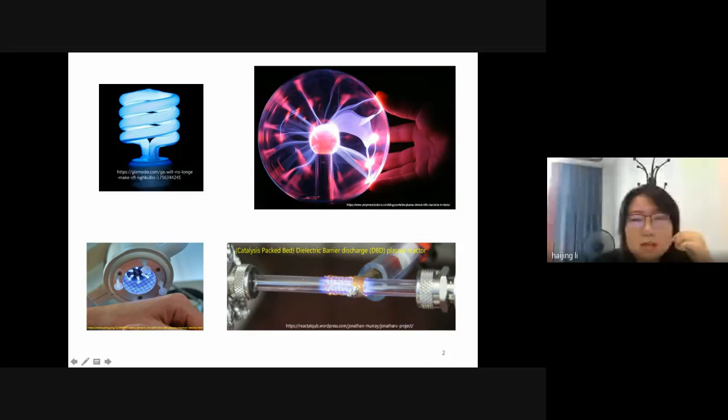First, we want to know the interplay between the fluid and the simplified plasma chemistry. Second, we try to get a phenomenological model which can qualitatively predict the result. The work is on a dielectric packed bed reactor.

We have positive and negative electrodes on the top and the bottom boundaries. The dielectric packing beads are homogeneously located in the reactor. A fluid with only neutral species A will flow into the reactor, and because of the electric field there, electric breakdown reaction will take place.

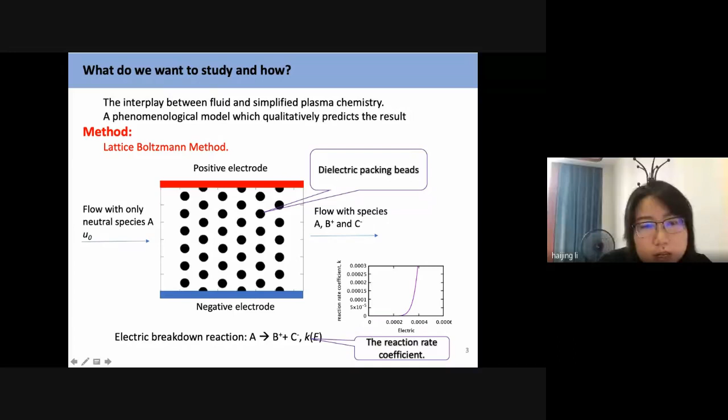It will make the neutral species A react into the positive B and negative C. The reaction rate coefficient K of this reaction is a function of the local electric field. From this curve plot, we know that if the electric field is lower than this value, K is almost zero. This means almost no reaction takes place.

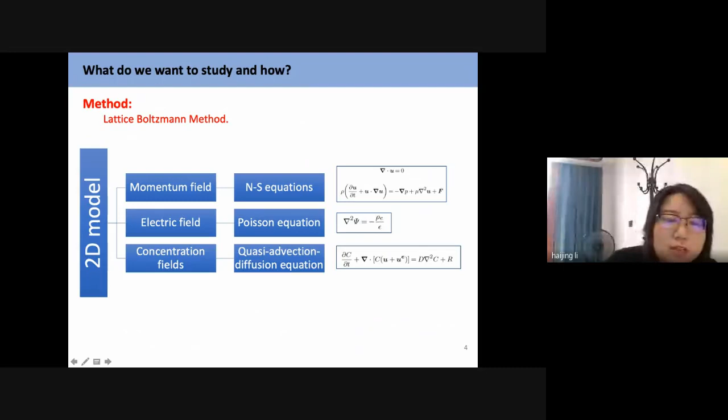We work with the lattice Boltzmann method. We have developed a 2D model. We have Navier-Stokes equations for the momentum field, the Poisson equation for the electric field, and a quasi-advection diffusion equation for the concentration field. This quasi equation is derived from the advection diffusion equation and the Nernst-Planck equations.

In the Poisson equation, this rho C is the volumetric charge density of the charged species. It will include the influence of the charged species in the concentration field into the electric field. And in this quasi equation, this UE is the equivalent velocity that is introduced by the electric field on the charged species.

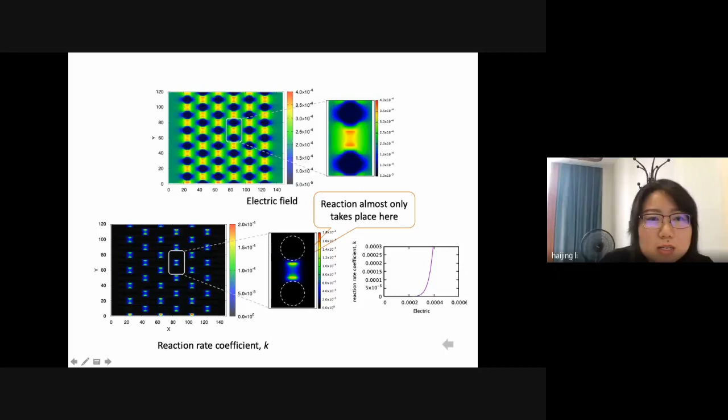This is the electric field distribution. From this plot, we can see the electric field between the beads is enhanced dramatically. This makes the reaction rate K only exist here, while in the rest of the area it is almost zero. This means the reaction almost only takes place between the beads.

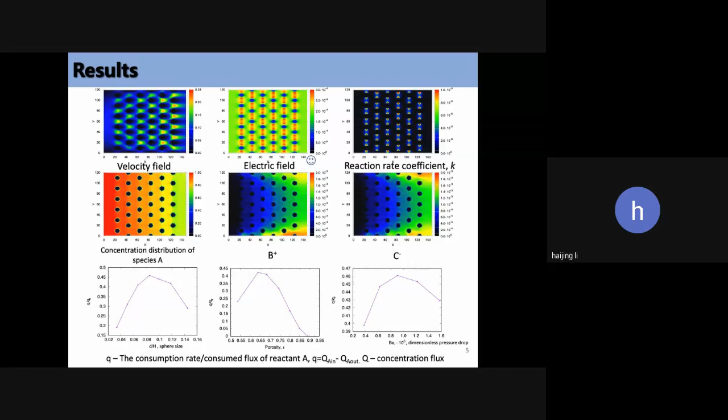To measure the conversion efficiency of this reactor, this Q will be the inlet concentration of A minus the outlet concentration flux of A. This is Q as a function of the sphere size, the packing porosity of the reactor, and the pressure drop of the fluid in the reactor. From this plot, we can see there are trade-offs between Q and these control parameters.

And the peak point exists. This means the control parameter at this point is most efficient for the reactor. With this lattice Boltzmann model, advances can be made on the control parameters of the reactor to make better use of this kind of reactor.

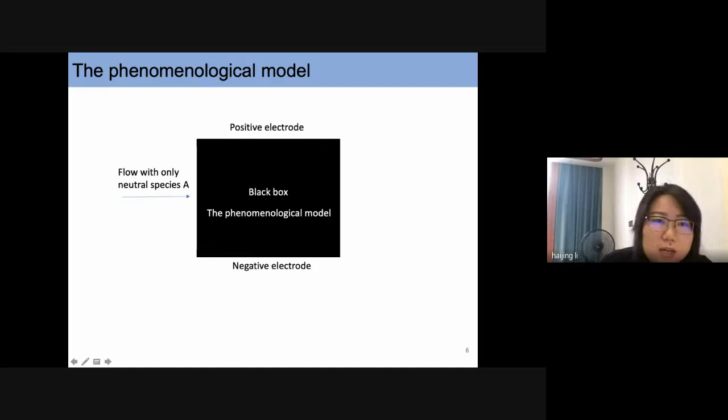After the lattice Boltzmann model, we tried to get a phenomenological model. In this model, we regard this reactor as a black box. If a fluid with only neutral species A flows into this box, with the phenomenological model, we want to get some information of the outcoming products. The aim of this model is, without running the test, it can qualitatively predict the dependence of Q on some control parameters and give advice on the most efficient control parameters at this star point.

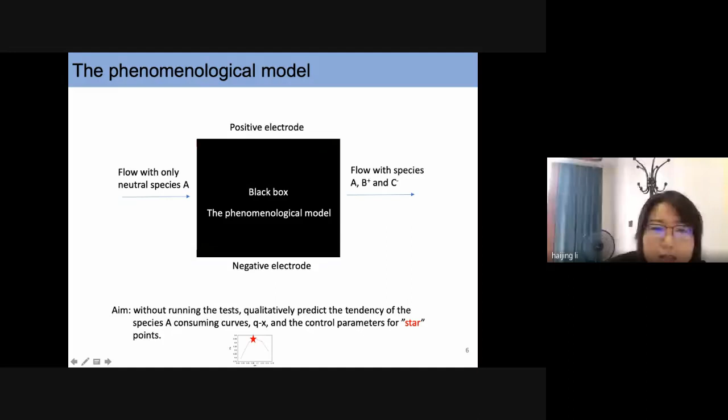So let's see, firstly, what information we have without running the test. First is the packing geometry of the reactor, including the dimension, the porosity, and the bead size.

Second is the potential of the electrodes. The third is information of the incoming flow, including the concentrations, the velocity, the density, viscosity, and the fluid pressure drop in the reactor. The last one is the reaction that's going to take place in the reactor, and the reaction rate coefficient as a function of the electric field.

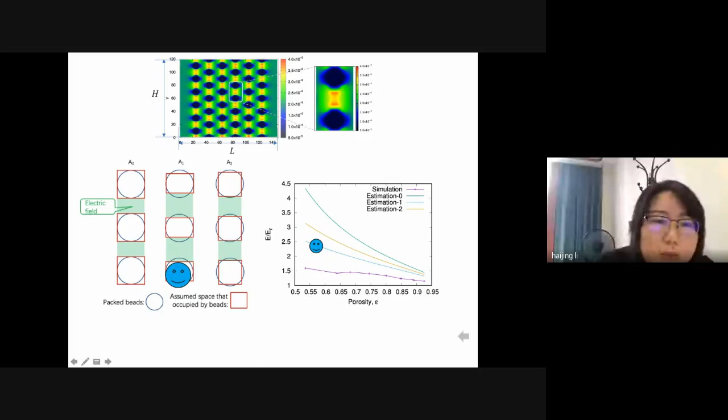Here are the results of the electric field from all these assumptions and the simulations. From this result, we can see the result of assumption 1 is the closest one to the simulation. So we apply assumption 1 to our phenomenological model.

The average electric field will be the gradient of the potential drop between the electrodes, and here we only take the green areas into consideration, because from this figure we can see the potential drop inside the sphere is relatively small. In this equation, Ny is how many green areas there will be, and in a homogeneously located spheres packed bed, Ny can be calculated like this.

Finally, the average electric field will be read like this, and we add an H into this equation. It is a correction factor to make assumption 1 closer to the simulation.

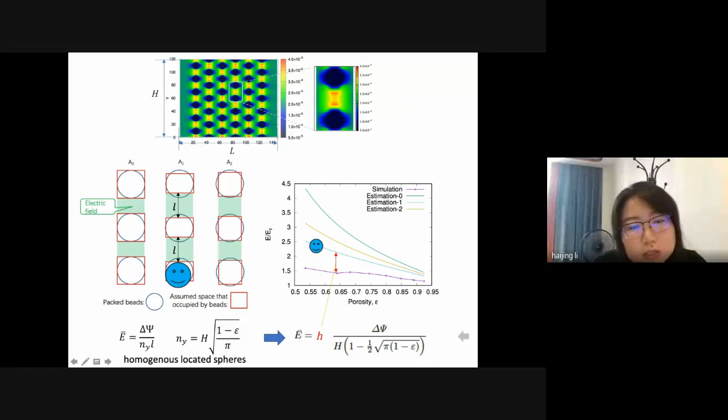At last is this T. This T is the time duration the reactant stays in the reactor. Similar to the electric field, we also only take the green areas into consideration, and T can be calculated like this. This U bar we can get from the Darcy law.

So finally, we have it like this. Now we have every piece of information for this equation. We can use this equation to calculate Q and make some predictions.

Finally, the conclusion and outlook. First, we found the dielectric packing beads can locally distort the electric field and make a difference in the reaction.

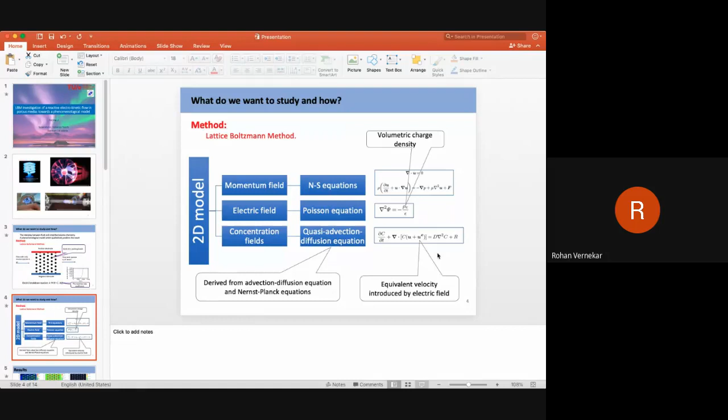No, I think it is a function of - let's see, the electric field will make a force on the charged species. It will accelerate or slow down the charged species. So this ue is a function of the electric field and the charge of the charged species. Yes, so if the charge of the species changes, ue will change, right? Is this what I understand? Yeah. Okay, so as the reaction proceeds, you'll get a different ue.

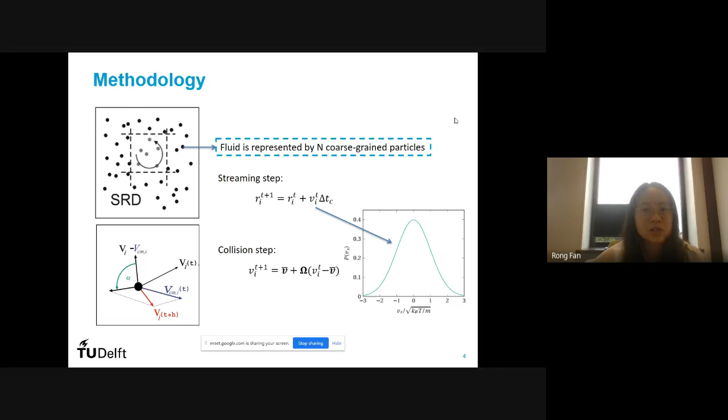Since we are going to study a reactive system, we would especially care about the boundary conditions, because for heterogeneous catalyst, the reaction happens on the solid surface. So in SRD, there are two ways you can achieve a no-slip boundary condition.

First, you can make the particle directly bounce back with the opposite velocity from the solid wall, or you can make the particle bounce back with a new velocity which still follows the correct velocity distribution. The second one is called stochastic bounce back. Later, I will tell again how it is used in our simulation.

I also listed some of the units and parameters on the slide of SRD for your information.

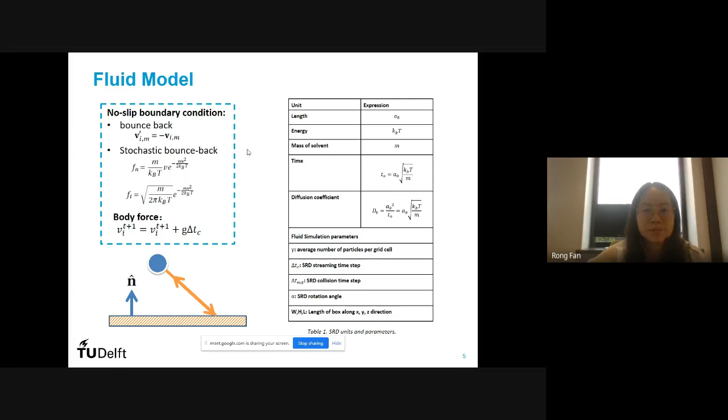Okay, so now I have already told something about the method itself. Then I'm going to give more details about how we simulate the reactive system. First, we need to define the geometry.

To define the geometry for the catalyst pellets or for the microchannels, the micropores in the catalyst - one advantage of SRD is that it is a lattice-free method, so you are relatively free to define the geometry with any mesh you like.

And also, that's another way - you don't need to mesh it, but you can also define your geometry based on some shapes which can be mathematically described. Like you can define the catalyst as spheres, and the spheres can be condensed to be packed in the domain. It will be like the catalyst pellets packed in a packed bed reactor.

So after we have the way to define the geometry, we could probably think about the reactive surface. In SRD, you can also simulate a Langmuir-Hinshelwood reaction mechanism.

Like this: when a particle hits on the surface, a probability test would be taken to decide if the particle is going to stay on the surface, if it's going to be adsorbed, or if the particle is going to be bounced back to the fluid.

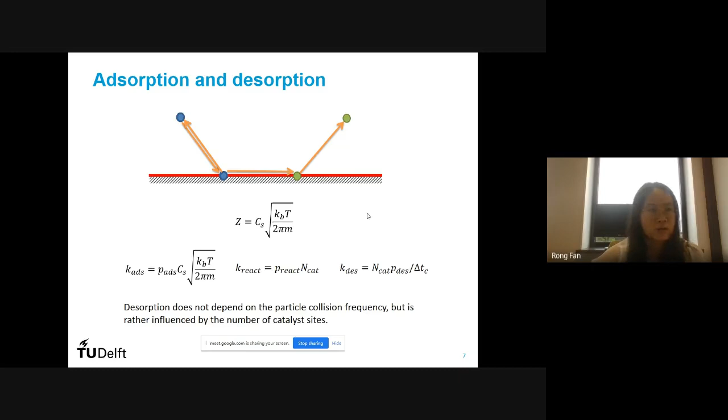Now that the reactive surface is already defined, I'm going to show you a case about how we simulate the reactions in SRD.

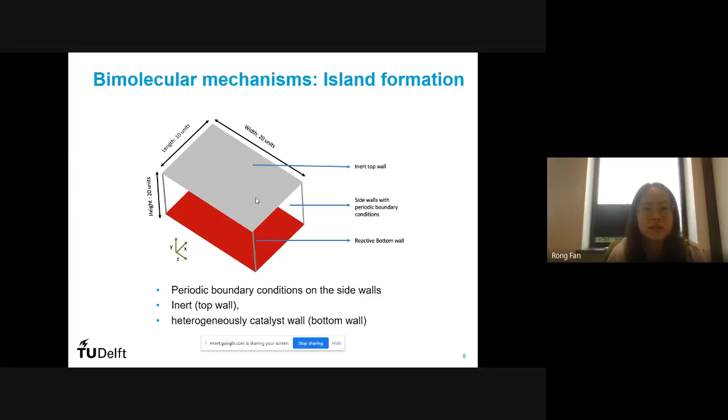As can be seen in the graph, in this domain there are two surfaces: one is reactive, in the color of red, and another one is not reactive, and enclosed is the SRD fluid. On the reactive surface, a bimolecular reaction is going to happen.

It is a simple, irreversible A plus B to C reaction. And we give it a little interesting feature for this reaction.

So the reactive surface will be divided into square grids. One particle adsorbed on one square grid can only interact with its first and second neighbor, and we give it a different interaction between particles from two different species. Therefore, the particle will have a tendency to stay close to other particles which are from the same species.

So with such a feature, we will get particles adsorbed and reacted on the surface forming a pattern, which is like an island. With the island formation, this will lead to a non-mean field behavior, and this will actually influence the reaction rate.

We compared the occupation of the unreacted particle on the surface with the mean field assumption versus with island formation effects. You can see from this graph that with island formation, the occupation of unreacted particle will actually increase, because the chance that particles from species A and species B contact with each other will be lower.

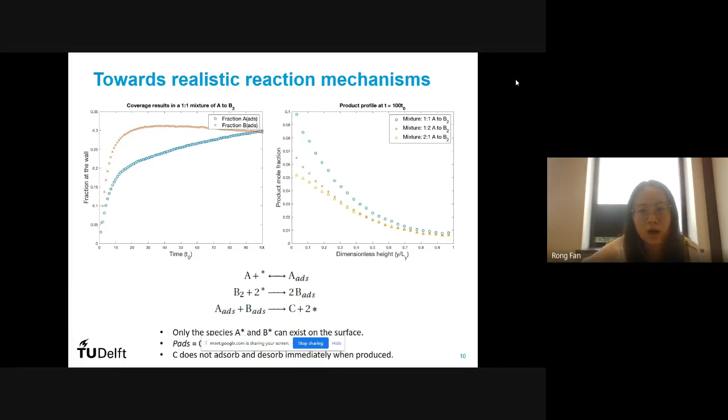So this is what we want for developing SRD: we would like to have the mass transfer in the continuous phase and the reactive surface reaction simultaneously. I have already talked about the reaction and mass transfer part for SRD, but we also care about the energy change during the reaction, because the energy change will result in some temperature change, and the temperature change will actually influence the rate of reaction.

For SRD, unlike CFD, you cannot directly see the temperature as a parameter in the simulation—it is a method with thermal fluctuations. So actually the only way you can know the temperature is to measure the velocity distribution and get the temperature from that distribution. Because of this, most current research with SRD uses thermostats to control the temperature in a certain range, but doesn't include real-time temperature change with the reaction.

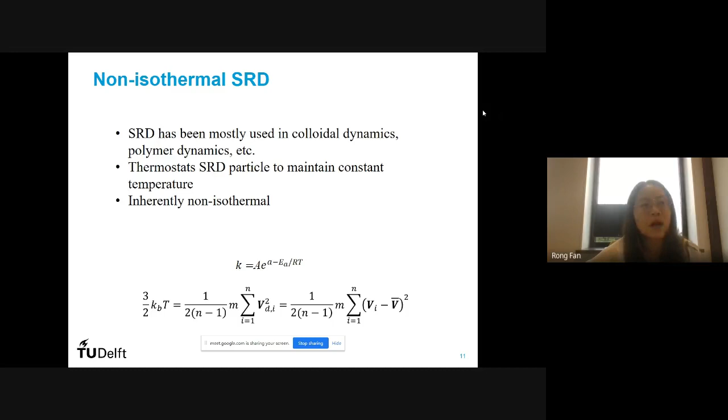Our ambition is that for the chemical reaction, we could measure the real-time and local temperature change. So how can we do that? We have to measure the velocity distribution, then collect a lot of samples of the particles to get the distribution, and then get the temperature.

The first and simplest way you can think of is that if you have steady states, you can collect samples from different time steps and do time averaging to get the temperature for the whole simulation. Or if unfortunately you don't have steady states but you have a symmetric system, you can still collect samples from different spatial positions to get the average result.

But what if you don't have steady state and you don't have a symmetric system, and you want to really measure the temperature in a quite complex geometry, really locally? We figured out there's still one way to do it: if you have many parallel simulations that are all equivalent to each other, you can collect samples from these simulations to get an average result for your temperature, then fit this temperature back to the simulations. This way, you can actually simulate chemical reactions with real-time temperature change.

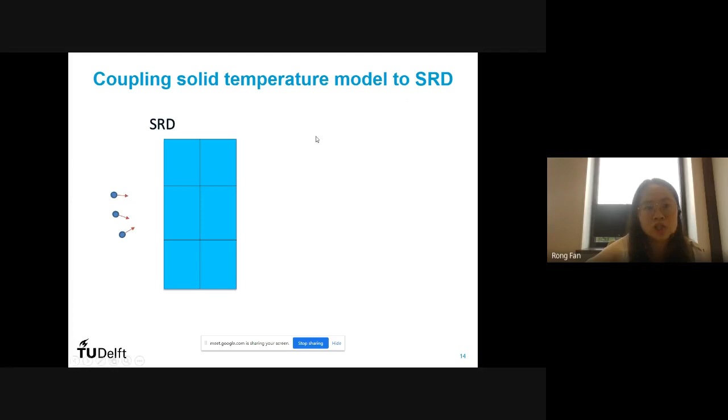Thank you very much. I will just show you some graphs about our case. We did some tests for the temperature change in the fluid, and also measured the thermal diffusivities, and we also did the temperature change between the solid phase and the fluid phase—a measurement for the temperature change in a solid sphere in a 3D box-like domain with a hot fluid line.

So now, as the summary for this presentation, I presented three developments we made for the SRD method to achieve simulating the reactive system. Our future plan is that I hope we can combine all three developments to simulate a realistic chemical reactor, combining also the transport phenomenon inside it.

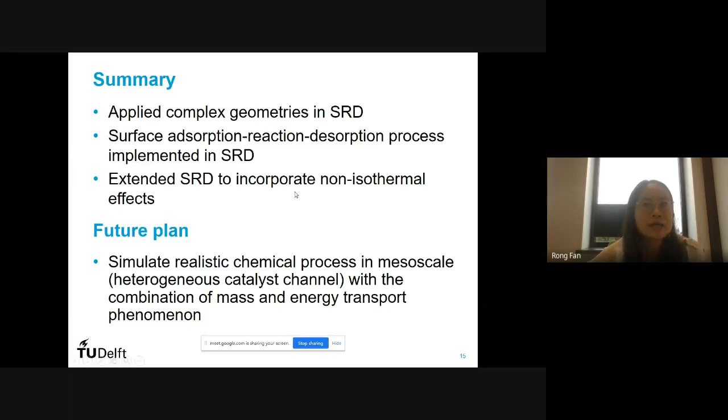Before I end this presentation, I would like to thank everyone who contributed to this project, especially the master students who did a lot of the simulation work. And that's all, thank you for listening.

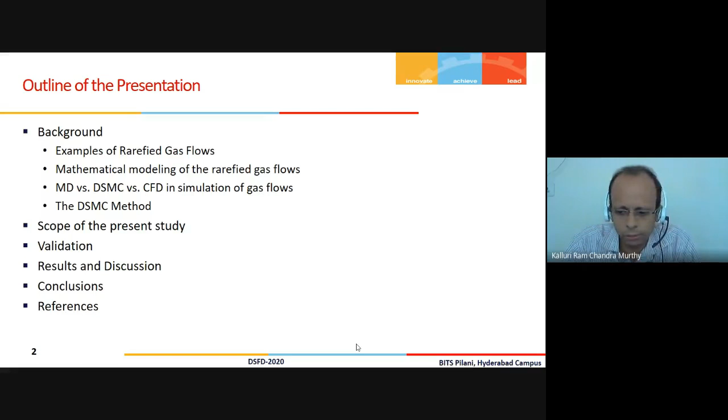I think this problem is somewhat different from most of the other talks, which are based on LBM. This is a slight departure, and it's based on DSMC method. This basically deals with rarefied gas flows, which are flow of gases at very low densities, and they are characterized by something called Knudsen number, defined as the mean free path of the molecules divided by the characteristic length scale of the problem.

So there are several instances where you encounter such flows, typically aerospace applications, when we are talking about flow around satellites or re-entry vehicles or nozzles and jets in space environment.

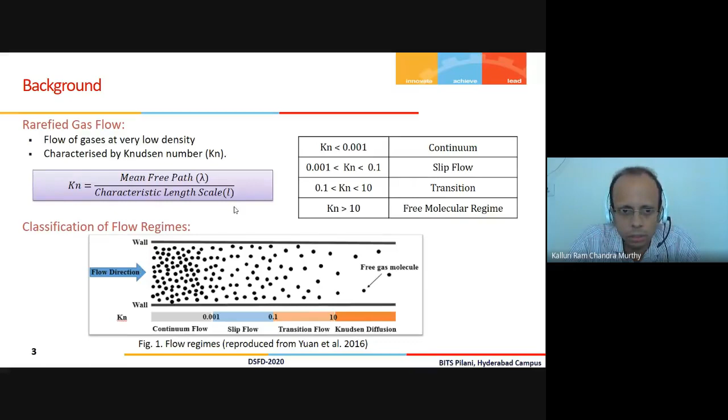In addition to that, we also see the same flows in micro scale, that is typically in microfluidics. Because the Knudsen number is given by lambda by L, in microfluidics the characteristic length scale is inherently small, so Kn is supposed to be large. That causes these flows also to be in the rarefied regime.

So there are several techniques typically used to model such flows. Typically the Navier-Stokes equation fails there because the continuum assumption itself fails there. So for the slip regime, we can modify the Navier-Stokes equation slightly with respect to the boundary conditions and proceed with the modeling. And typically in the rarefied flows, the kinetic theory of gases is employed to analyze them, and the Boltzmann equation is used to model the flow.

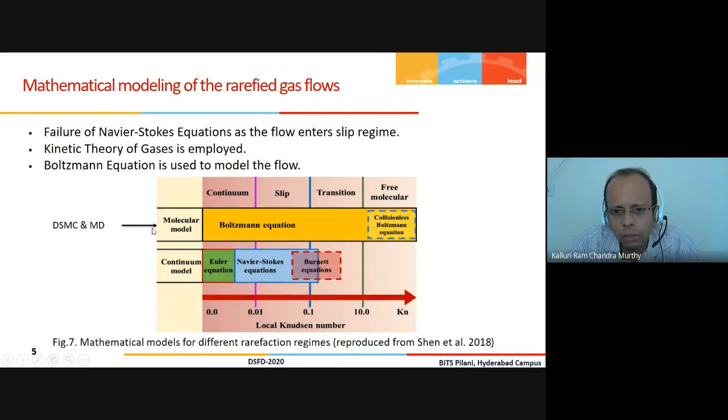So if you're talking about continuum modeling, we have Euler equations at very low Knudsen numbers, and then the Navier-Stokes equation, and then the Burnett equation, which can partly deal with the rarefied regimes. But we also have particulate methods like DSMC and molecular dynamics, which solve the Boltzmann equation in a stochastic manner.

So in this present method, we employ the DSMC method, called the direct simulation Monte Carlo method, proposed by Professor G.A. Bird, and it solves the Boltzmann equation stochastically.

So essentially the idea is, when we have an enclosure with real molecules inside it, we group some of the molecules and call it one DSMC particle or a simulated particle. The algorithm proceeds this way: we initialize the particles with positions and velocities, and move these individual particles as they interact with the boundaries. We re-index their positions in the entire domain, which is divided into different cells for sampling the flow properties.

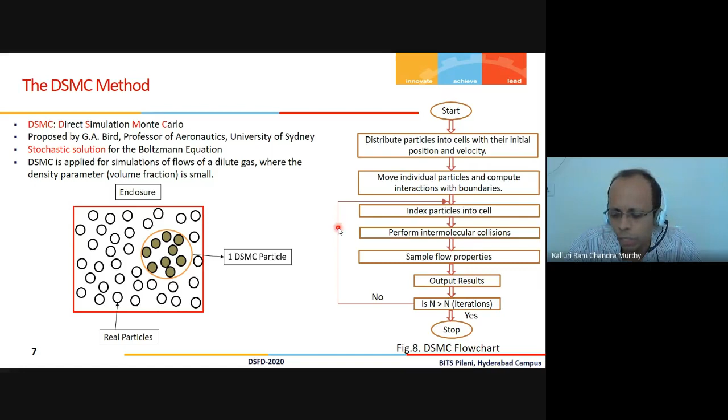In each cell, the molecular collisions are performed, which is basically probabilistic in nature. Then the flow properties are sampled as averages of pressures, temperatures, and so on. Once the simulation has converged, we sample this and output the flow quantities. So that's basically the outline and background of this method.

In this present study, we are using the dsmcFoam solver, which is part of OpenFOAM, to first validate a benchmark, and then we study the flow over an open cavity, where we have three different physical quantities: Mach number, Knudsen number, and wall temperature ratios, for which we simulated the problem.

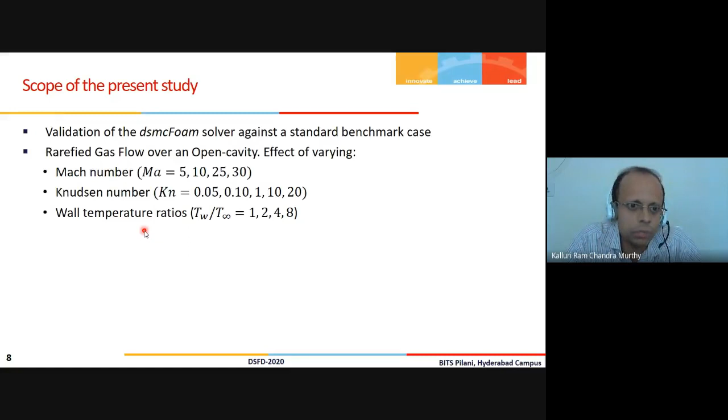First, let me present the validation of this problem over a flat plate. We considered hypersonic flow over a flat plate, one of the simplest problems to begin with. There are several experimental results by Becker and others for the flow of helium over a plate of 50 mm length and 25 mm width approximately. The same has also been validated numerically by Hermina and the group for these flow configurations. The temperature is roughly 10 Kelvin, pressure is 0.3 pascals, and the free stream velocity is fairly high, 1700 meters per second, along with other flow properties.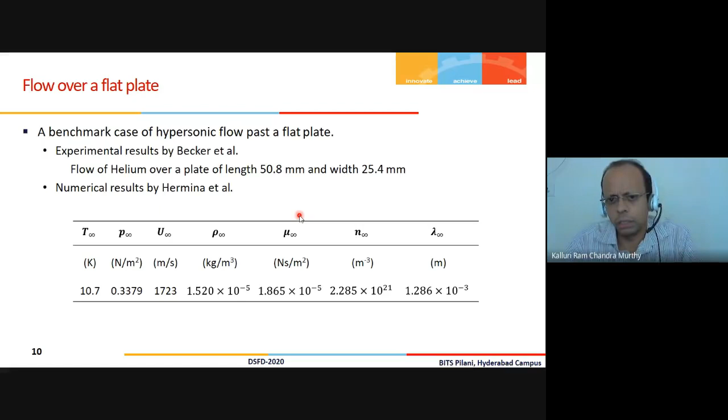Next, I'll go to the main theme of this talk, which is rarefied gas flows in an open cavity. This is a well-studied problem in traditional fluid mechanics using continuum flow solvers. Essentially we have a flow occurring from the left side to the right side, where the inlet boundary on the left is modeled as a free stream inlet, and even the top boundary, supposed to be sufficiently far from the cavity, is also modeled as a free stream inlet, though the flow occurs only parallel to the bottom surface. The right side surface is modeled as an outlet, and the bottom surface is the no-slip wall.

However, since this is a rarefied flow, we do see slip flow close to the wall. The beginning portion of this domain is given a symmetry boundary condition, so that the flow has time to develop and stabilize.

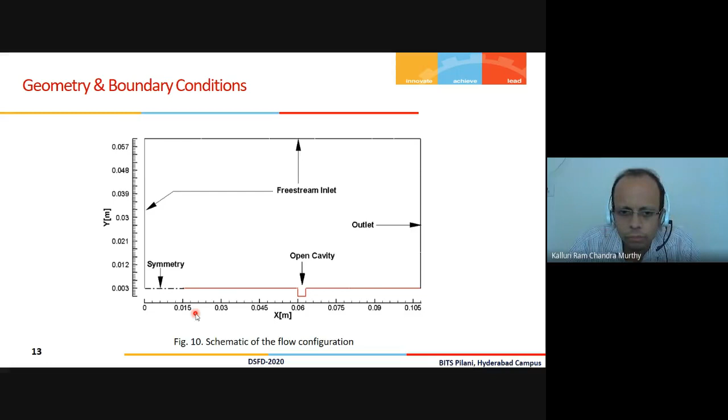Coming to the computational methodology, we are assuming that the DSMC molecules are modeled as hard, elastic, perfectly smooth spheres, and the fluid is taken to be non-reacting air, a combination of nitrogen and oxygen for the most part. For simulation parameters like time steps, cell size, and particles per cell, we followed the DSMC guidelines, which typically give converged results for such chosen parameters. We used the solver DSMC Foam, a C++ based code under the framework of OpenFOAM, and for collision kinetics to model intermolecular collisions, we used the VHS model, variable hard sphere, with the no time counter scheme.

We have varied Mach number, wall temperatures, and Knudsen numbers, using the analogy of a re-entry vehicle at different altitudes, at which we pick the flow properties from the US standard atmospheric tables. This gives the densities, number densities, and viscosities of the fluid, and so on. Based on these mean free paths, we calculated the Knudsen numbers correspondingly, which are roughly 0.05, 0.1, 1, 10, and 20.

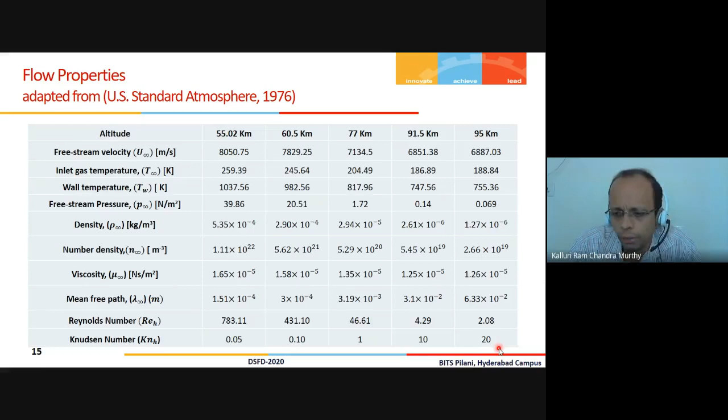We have studied these cases, summarized in one slide. In the first table, the first 4 cases are for constant wall temperature ratio. In other words, the bottom wall, where the cavity's surface is, is held at a constant wall temperature ratio, where T infinity is the free stream temperature, and we have varied the Mach number from 5, 10, 25, and 30. After that, we held the Mach number constant at 25, which is the hypersonic regime, and varied the wall temperature ratios from 1, 2, 4, and 8.

We have also looked at the effect of rarefaction, that is for different Knudsen numbers, by holding Mach number and temperature ratio fixed at 25 and 4 respectively. The Knudsen numbers I have chosen fall in all the different regimes: first is slip regime, next early transition, next transition, then on the verge of free molecular regime, and finally the free molecular regime.

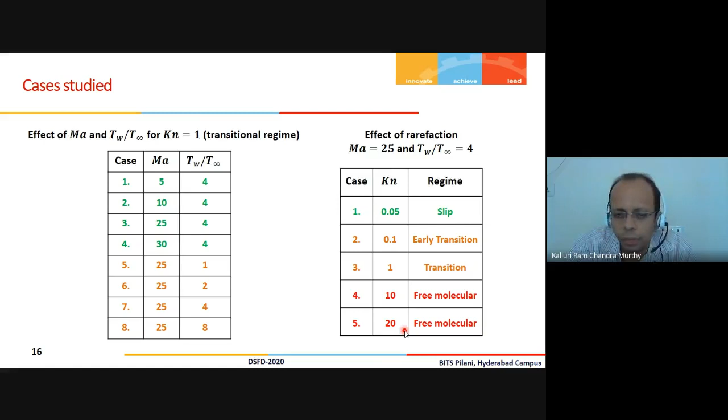So thereby we covered most of the flow regimes. Let me go to the results directly. First is the effect of Mach number.

These are some of the flow contours I would like to show just to get a feel of the problem. Here we have fixed Knudsen number to be 1 and wall temperature ratio to be 4. These contours are only shown for Mach 25, but I'll present the profiles later on for different Mach numbers.

showing strong gradients in the y direction. The cavity is sufficiently far located, and the height of the cavity is 3 mm in this case, and the width of the cavity is also 3 mm, and it's located at 60 mm from the inlet surface we have shown.

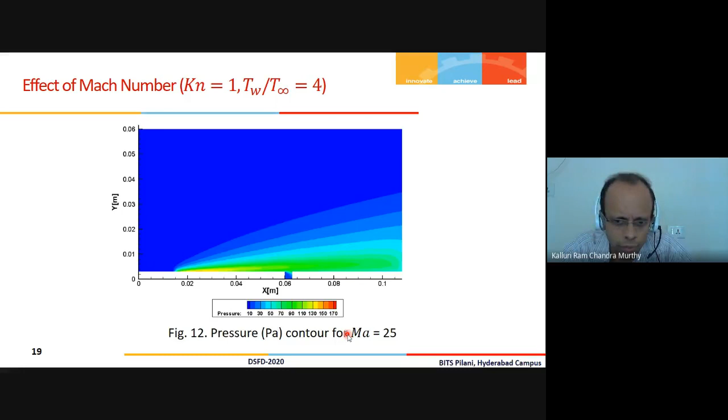And these are the pressure contours, and we see that here the pressure is close to the free stream pressure, and very quickly it goes to very high values just as it encounters the plate, and the pressure ratios are roughly 170, as shown by the red curves.

Similarly, we also see the temperature ratio, or the temperature itself, reaches a very high value. Initially it's much smaller, but very soon it reaches around 8000 Kelvin. This is because of a strong shear layer that develops right over the plate, and this propagates downstream, carried by convection. This strong viscous dissipation, because of high shear, is what causes these strong temperatures. And of course, we also have the compressibility effects because the Mach number itself is 25, as we see here.

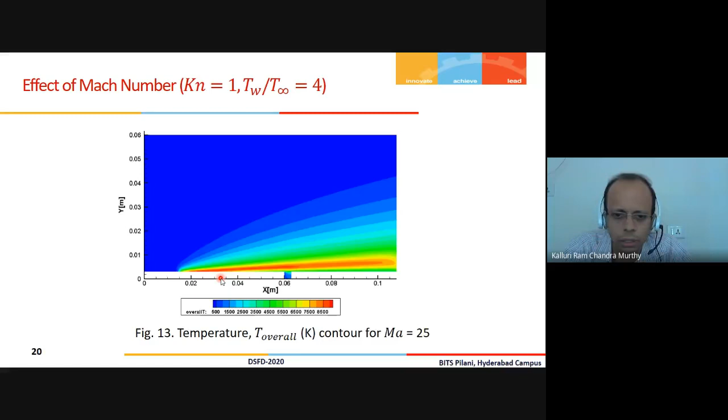So next, I'll show the contours and graphs of variation of density, velocities, and so on at 4 sections. If this is the cavity, I've taken one section here which is x equal to 59 mm, this is 61, this is 62, and this is x equal to 64 mm.

At these 4 sections, I would like to show some of the profiles, how they vary over the vertical distance normal to the bottom surface. So these are the 4 sections and velocity, non-dimensional velocity profiles at 4 sections for different Mach numbers.

The previous contours were all for Mach number 25, whereas these are for different Mach numbers. This 0.06 m corresponds to the topmost surface of this domain, where flow quantities are barely affected by the presence of the cavity or the bottom surface itself. That's why we see that in all the 4 profiles, as we look at y equal to 0.06, all the profiles overlap with each other.

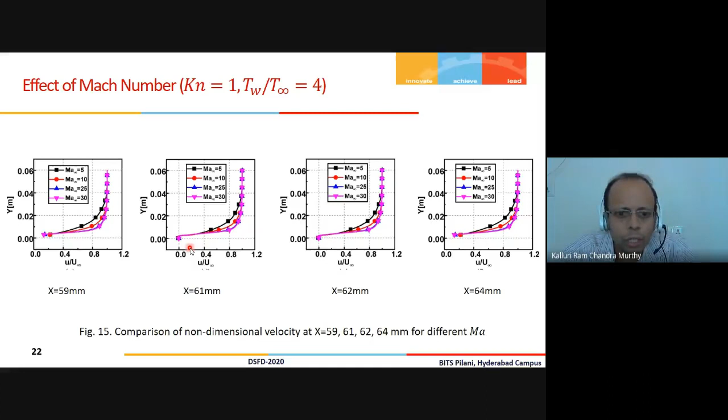That is, all the Mach numbers 5, 10, 25, and 30 show similar values of velocities, pressures, or other physical quantities. Whereas more interesting behavior occurs right at the bottom wall or inside the cavity. We see that inside the cavity, which corresponds to y equal to 0, we have a strong vortex, though it's hard to see here, and the velocity profiles themselves take negative values there.

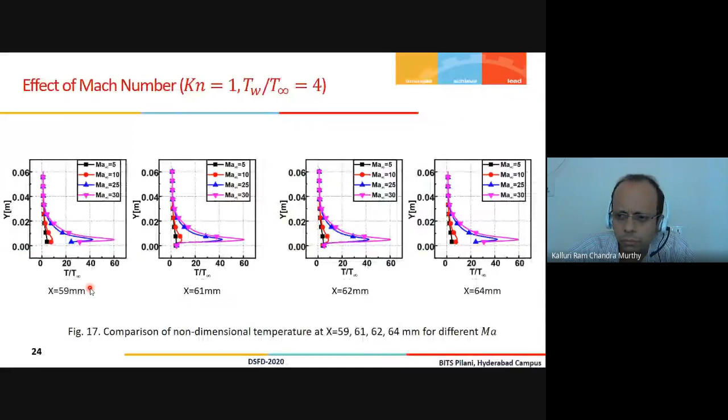The same trend is observed for temperature, since we see the same profiles qualitatively. In this region with a strong shear layer, that's a region of high non-equilibrium where the ideal gas laws do not hold. So direct simulation Monte Carlo is the only way to predict what's happening.

Next we'll go to the effect of wall temperature. Here we see a relatively small effect of wall temperature, though obviously near the wall region we see some change in velocities. But for a large part of the velocity profiles, we don't see an effect of wall temperature. We do see some effect in the pressures, because as wall temperature increases, it leads to localized heating, and the pressure and temperature can be expected to increase at those locations. So as the temperature of the wall increases, the pressure profiles also shoot up to higher values with respect to the free stream pressure.

The same trend is observed for temperature, though with relatively less variation.

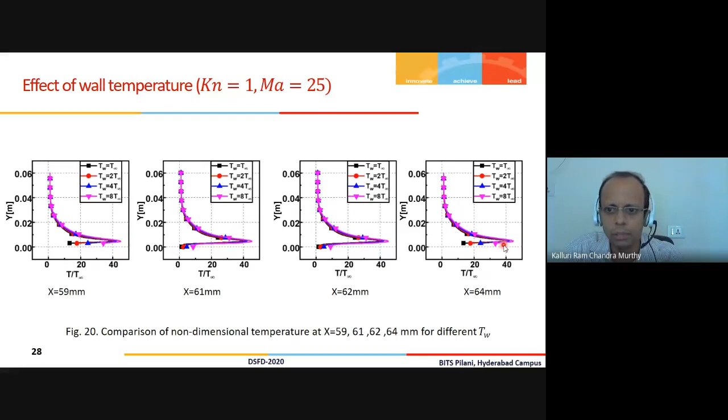Finally, the effect of Knudsen number. This will be more interesting, because here we've gone through all the different rarefaction regimes. Looking at the velocity profile, as we go towards higher Knudsen numbers from the black to green curve, we see that the black curves are more steep with sharper gradients, whereas the green curves slowly achieve the free stream velocity, and the corresponding boundary layer thickness is higher. That's understandable, because molecules can diffuse farther when there are fewer collisions with surrounding molecules.

These are the pressure ratios. We see that again, as the Knudsen number increases, the pressure ratios also increase near the wall as well as in the shear layer. A similar trend is observed in the temperature profiles.

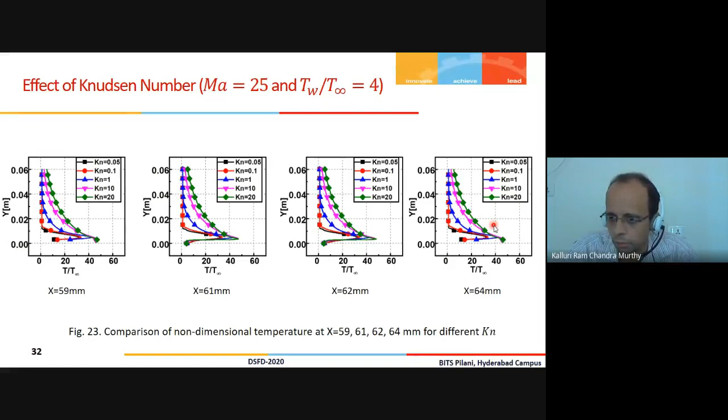We also see a definite temperature jump right near the wall, because as the Knudsen number increases, rarefaction effects show up as a temperature jump, and therefore we see differing temperatures as Knudsen number increases.

So that's basically the results of what we've looked into. To conclude, first, the magnitudes of different flow properties increase with Mach number in an overall sense. For example, pressures or temperatures shoot up to higher values as we increase the Mach number because of viscous dissipation and compressibility effects.

Increasing wall temperature also results in the same trend, though with a lesser effect. A significant variation is observed among the flow properties for different Mach numbers, whereas the variation is minimal for different wall temperatures, as I just mentioned.

The velocity profile suggests that at all sections, except inside the cavity, the near-wall velocity is non-zero, which is in contrast to the zero velocity at the wall encountered in the continuum regime. So I'm referring to the slip velocity in rarefied flows, and similarly the temperature jump.

With an increase in Knudsen number, the pressure and temperature ratios increase in the domain owing to viscous dissipation and compressibility effects. So these are primarily the findings of our work, and these are the references for this.

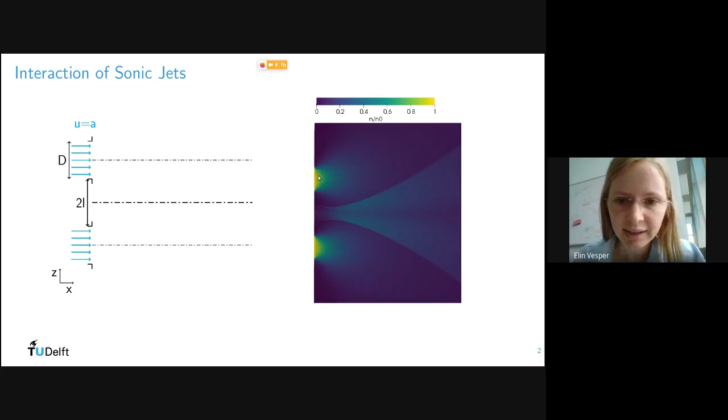Chandra Murthy already told us that DSMC needs to be used if we would like to look at the vacuum flow or high Knudsen number flow. However, if we use DSMC at the inlet or in between the two shocks, we have a lot of molecules, meaning a lot of particles to simulate, and the computational cost is too high. Therefore, we would like to use two things: DSMC in the outside region and kinetic models which approximate the flow in the high density regions.

I wanted to talk a little bit about direct simulation Monte Carlo, but as Chandra Murthy already told a lot, I will keep it brief. We have the Boltzmann equation, which we can split, similar to lattice Boltzmann, into the particle motion and the collision step. The big difference is we don't have a lattice, but we let our particles move freely in space. We can put that in an algorithm where we insert new particles, move the particles, let them collide, and afterwards calculate our macroscopic fields.

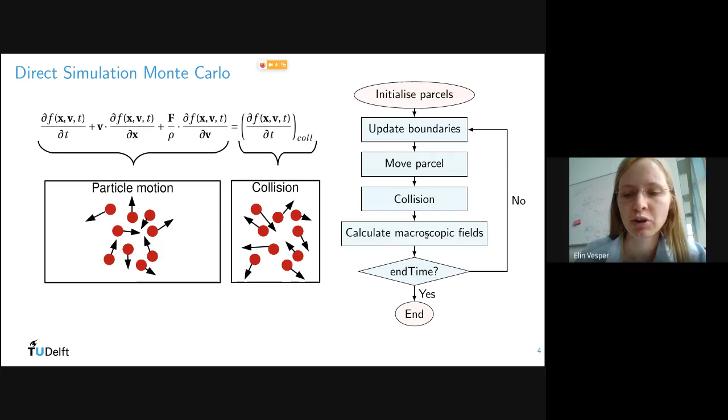We have a pairwise collision selection in the collision step, so it is different from lattice Boltzmann. We have free particle velocities, so we can also easily model compressible and supersonic flow.

However, the big disadvantage of DSMC is that we need a very small cell size, smaller than one third of the mean free path, and a time step smaller than one tenth of the mean collisional time. To have enough collision partners, we need at least 20 particles per cell. If we fulfill all these requirements, we would need billions of particles next to the outlet.

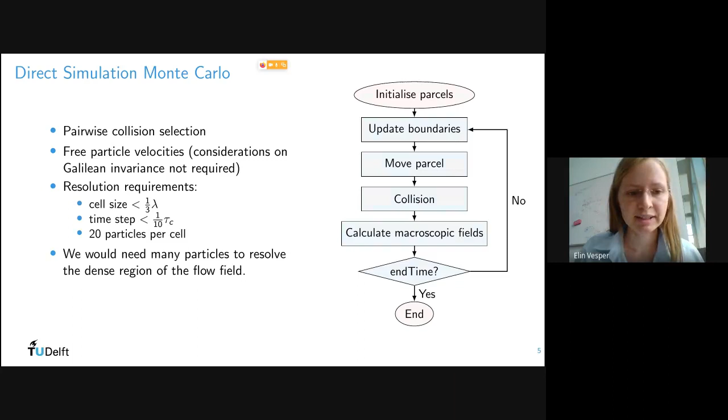Somehow we would like to reduce the number of particles there, and therefore we look into kinetic models. Kinetic models, similar to the ones used in Lattice-Boltzmann, substitute our collisions, which we resolve in DSMC, with a relaxation operator. So instead of doing the collisions, we have a relaxation step.

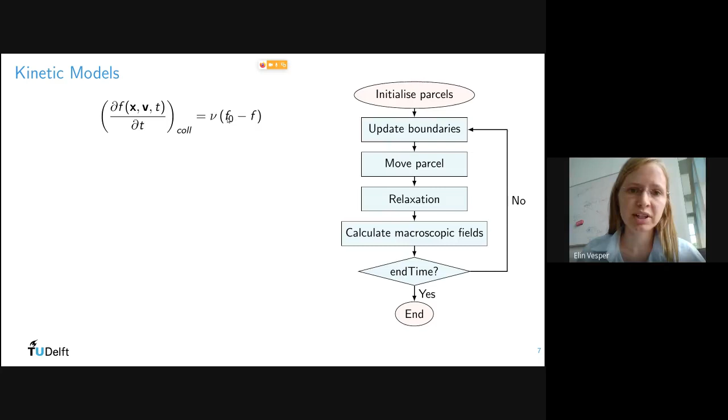Now the big question is, if we relax our current velocity distribution to a target distribution, which target distribution should we choose?

Already other people did this, Kumar and Pfeiffer, and they found that if we use relaxation, our requirements basically half. So we can take double the cell size, we can double our time step, but we have to increase the number of particles per cell.

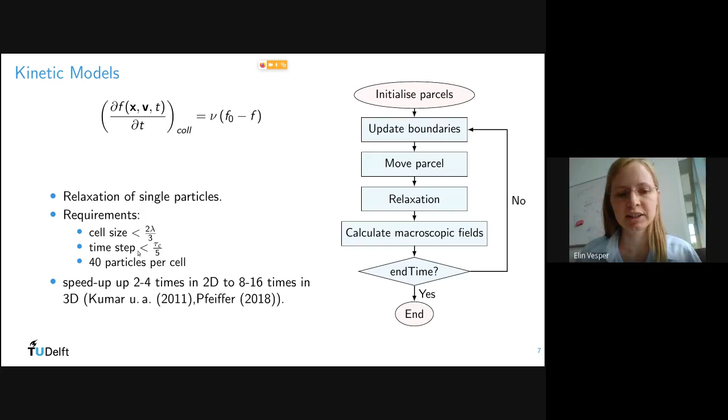If we look at which target distribution to choose, we have a few choices. We can choose the BGK model, where we just relax our distribution towards a Maxwellian, or we can change the distribution a little bit by transforming the Maxwellian with a tensor, which depends on the pressure, or by shifting it with a vector, which is a heat flux vector. These are two very commonly used models.

The last model came up in recent years, which is just to blend these two models, because researchers found that sometimes the ESBGK model and sometimes the Shakhov model is good. Then the idea comes up to blend the two models to always be able to approximate the flow well.

If we look at the properties of these models and whether they fulfill the basic requirements for kinetic models, then they fulfill all the conservation laws and all relax in equilibrium towards the Maxwellian distribution. The Shakhov and the UBGK model don't fulfill the H theorem, and the BGK model, as we know, does not have a Prandtl number of 2/3, but a Prandtl number of 1, which is why it cannot correctly model the ratio between viscous and thermal transport.

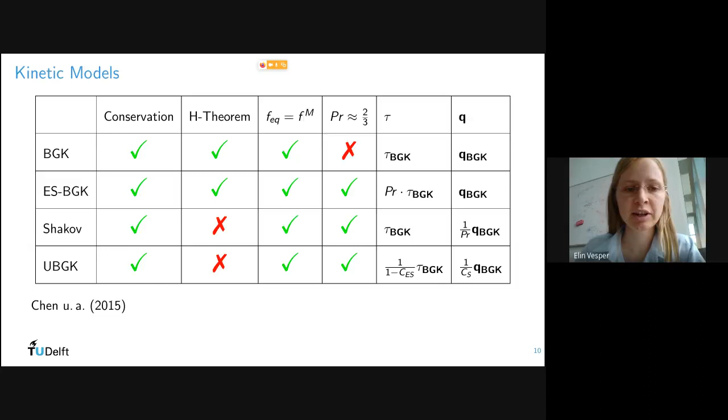After we now know all these properties of the models, let's look at two examples and compare the performance of the models. First, a shear-driven flow, where we look at a Couette flow between two isothermal plates at 273 Kelvin at a very high speed of 750 meters per second.

We will get viscous dissipation in the center, generating heat and a conductive heat flux towards the wall. However, we choose a very high Knudsen number of 0.14, between the transition and free molecular regime, so the information exchange between the core of the flow and the walls is not high enough to conduct everything to the wall.

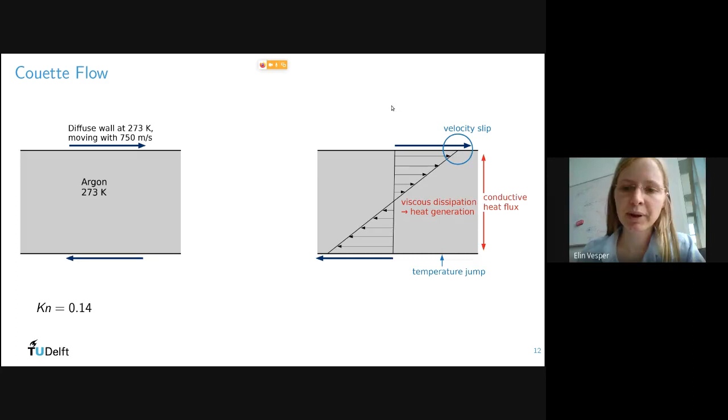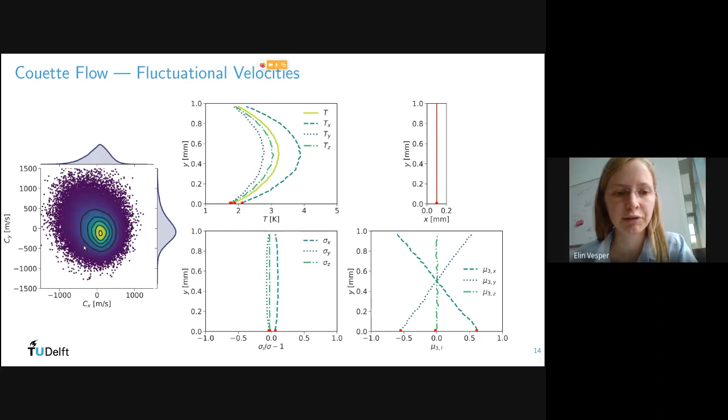If we now look at thermally driven flows, which is a quite interesting phenomenon we are normally not used to from continuum flow, this is thermal creep flow, which occurs when our temperature gradient along a wall is of the same order as the mean free path.

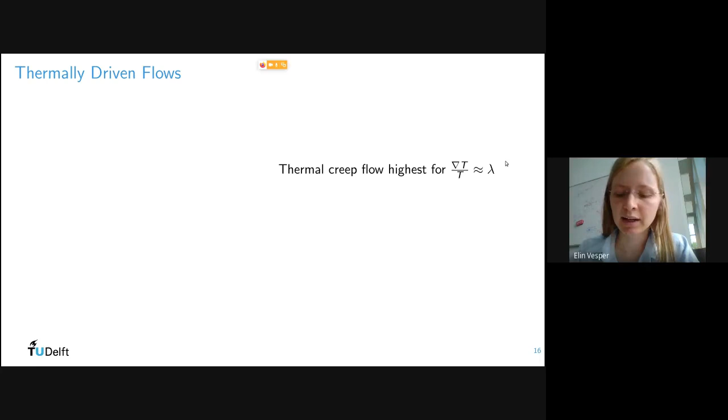Because of symmetries we only have to simulate a quarter of the domain, for example this quarter. And we expect, as said, a flow from the cold region of the wall towards the hot region of the wall.

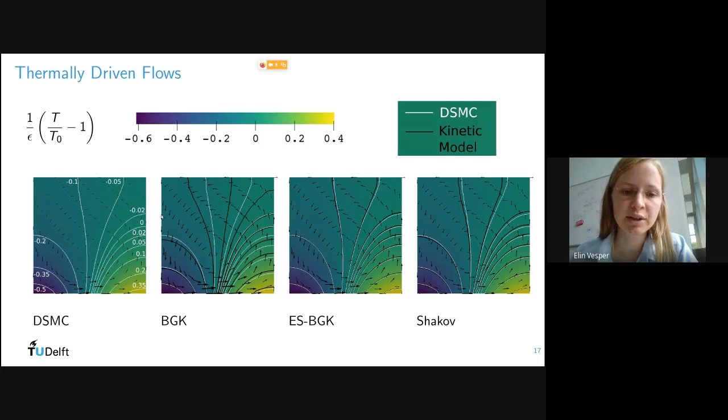At the performance of the different models, we can summarize, which Chen et al. already did, that ESBGK is good for thermally driven flows, Shakhov is good for shear-driven flows and shocks.

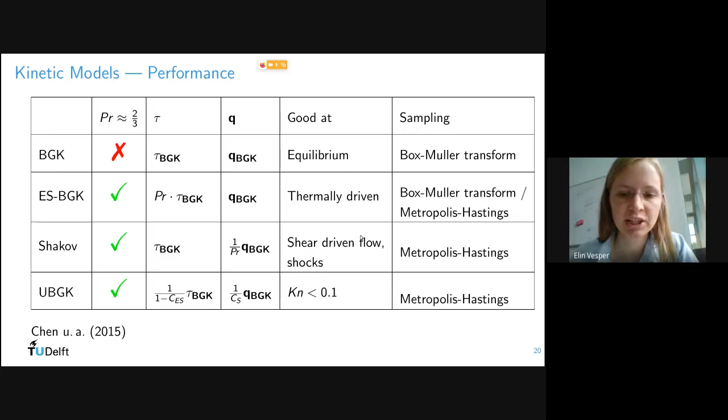If we look at the non-equilibrium which we have in this kind of flow, then we have first a temperature breakdown at the inlet, which is basically because the particles which leave here at the inlet go in different directions after the inlet, because we're in vacuum.

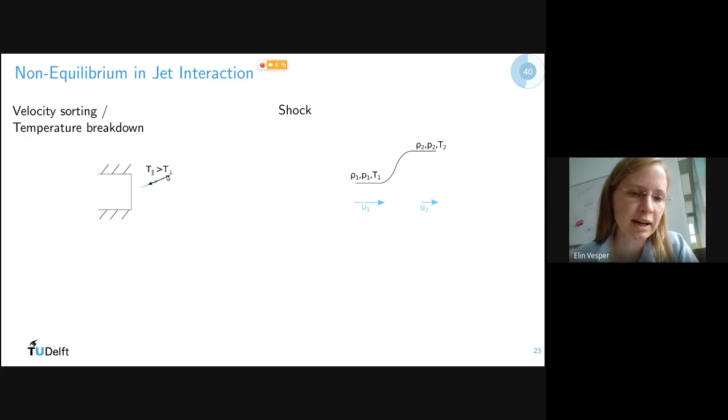And if we look at the velocity distribution along this point, we see that we have very high velocity fluctuations parallel to the mean velocity and very small ones orthogonal to the mean velocity. This effect increases the further downstream we go from the inlet.

Then another non-equilibrium phenomenon we have in this flow is, of course, at the shock. In the shock, we have a small density and temperature before, and high density and temperature after the shock, and a high velocity before and small velocity after the shock.

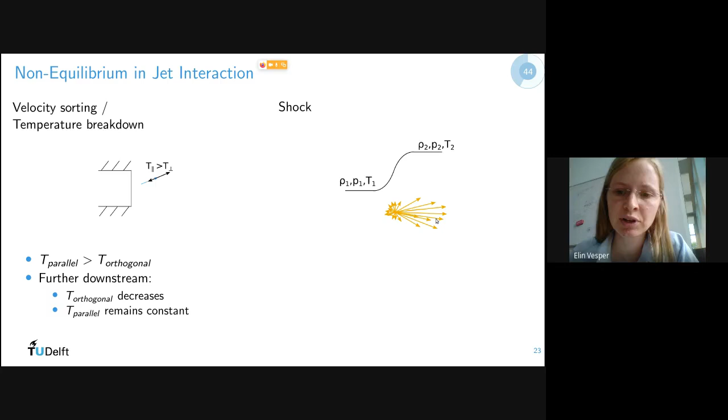And this comes basically down to the fact that we get inside the shock a skewed velocity profile. Also, what will happen is that the parallel temperature will increase first inside the shock, and afterwards the other energy modes will increase.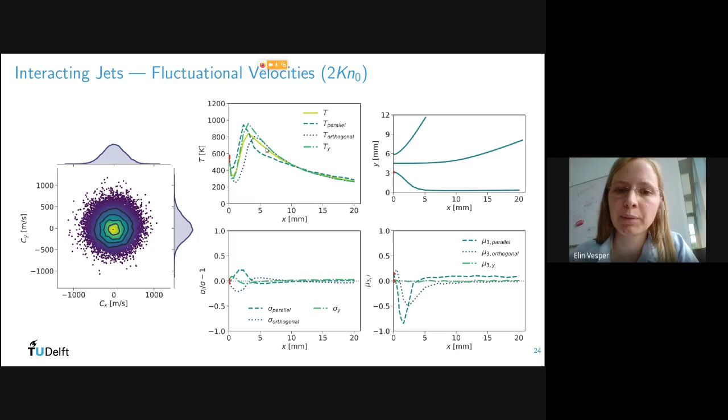If we go along one streamline, here the lower streamline in the upper right picture, first the temperature will decrease, then our parallel temperature will first increase and the other temperatures will increase later, and after the shock the temperatures relax again towards each other.

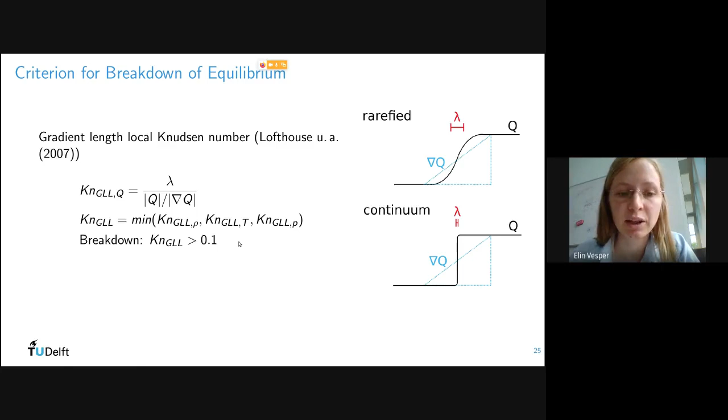If we now compare our different models - sorry, I forgot that - we have to define where we can use DSMC and where we can use our kinetic models. We do that with a gradient length local Knudsen number. If it is above 0.1, then we have to use DSMC, otherwise we can use our kinetic model.

And that is, besides very small deviations, nearly independent of whether we use the pure ES-BGK or whether we couple it with a hybrid model.

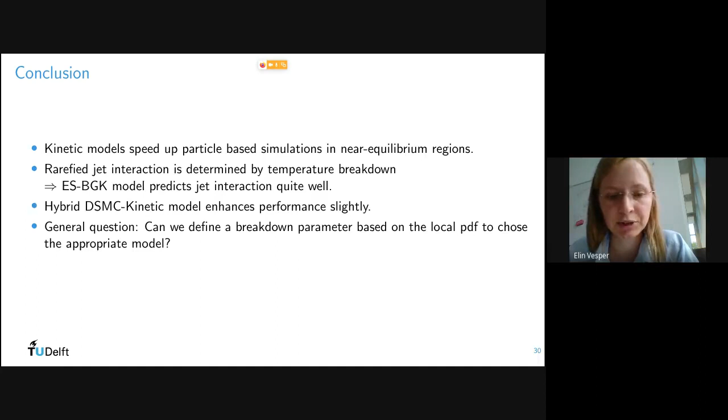Thank you very much for your attention.

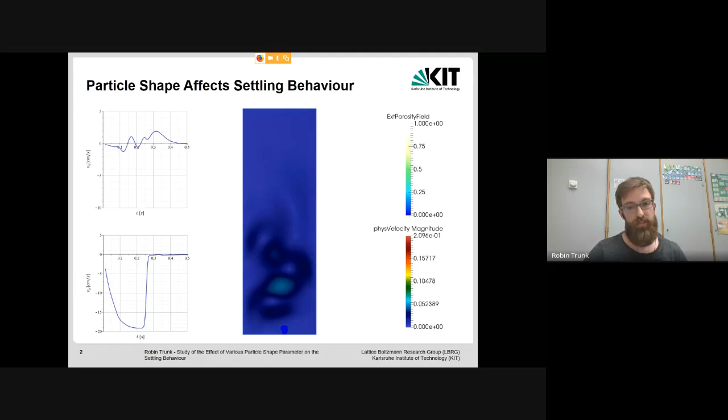So I'm going to talk today about a study on the influence of particle shape on the settling behavior. First, a little video. This is a 2D slice of a particle generated from a CT scan, and you can see it starts to tumble depending on its shape. It starts to orient itself in the flow, and the flow velocity also depends a bit on the shape of the particle. So it can be beneficial to understand more of the settling behavior, especially in cases of very fine particles in the region of 100 nanometers to 10 micrometers, where separating different particle sizes can be quite tricky.

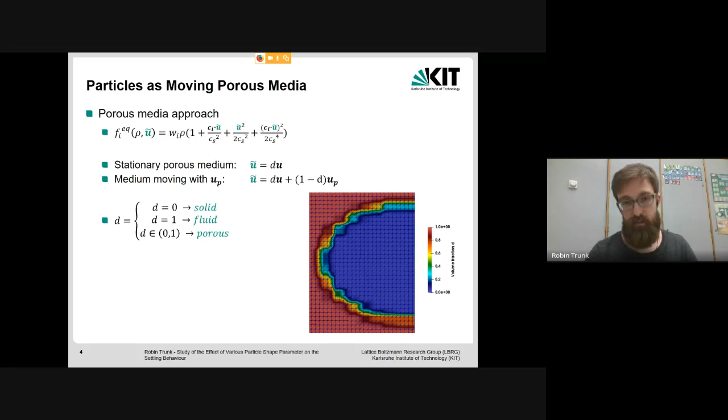But what we need are some forcing schemes, and we also need to calculate the hydrodynamic force that is acting on the particle to calculate its further movement.

So we have different forcing schemes at hand. There is, for example, the Shan-Chen forcing scheme, which, as already shown, just modifies the equilibrium velocity. There's also a Kupershtokh forcing, which adds a source term to the collision term and leaves the equilibrium velocity unchanged. And also there is a Guo forcing, for example, which changes both of these terms.

So in my further presentation, I will compare some of these forcing schemes and also hydrodynamic schemes to find the best one for our homogenized lattice Boltzmann simulations.

And for the hydrodynamic calculation of the forces, there are three schemes considered: the momentum exchange algorithm proposed by Ladd, a modification of it published by Wen, and also a momentum sink, which is tested as well.

So what we basically do is alter the equilibrium distribution and the collision term by the presence of the particle. If we consider the change we bring to the change in momentum, which is basically described in this term, we should get the force.

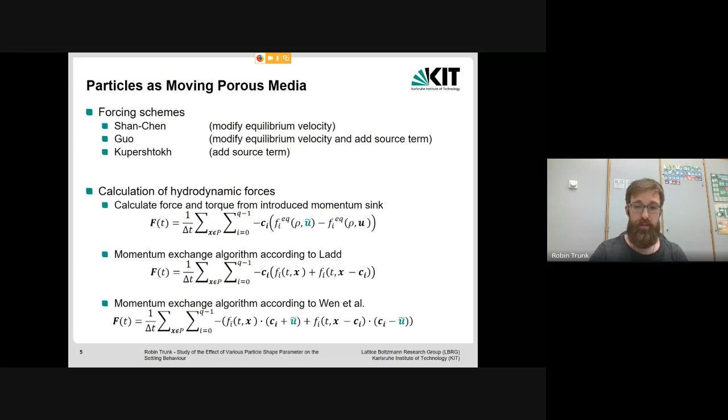We will see later on that this leads to strong deviations in a highly dynamic case, probably due to some inertial mass effects, which causes the hydrodynamic forces to be strongly overestimated. However, for the less dynamic or static case, the results of course coincide and are in good agreement.

So let's get to the validation. I considered the case published by Ten Cate et al., which considers spheres settling in the fluid media. He considers 4 different configurations which differ by the Reynolds number: 1.5, 4.1, 11.6, and 32.2.

So for example, the case where we use a Kupershtokh forcing and the momentum exchange algorithm by Wen et al., we get a root mean squared error of 0.0429, which is pretty close to the mean error of the experimental data. Mean error here means it is the mean over all 4 cases for the different Reynolds numbers.

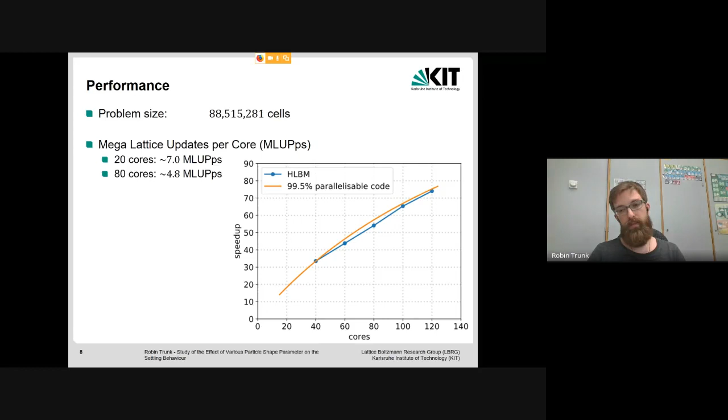There's also depicted the line for 99.5% parallelizable code, which basically means that the problem scales pretty well on clusters with multi-core systems. However, this problem size with 88 million cells is still pretty small, so if you want to go to a higher number of cores, you will of course need a bigger problem.

So to the application and also the statistical evaluation, which is what we are doing it for, we want to investigate the settling of particles.

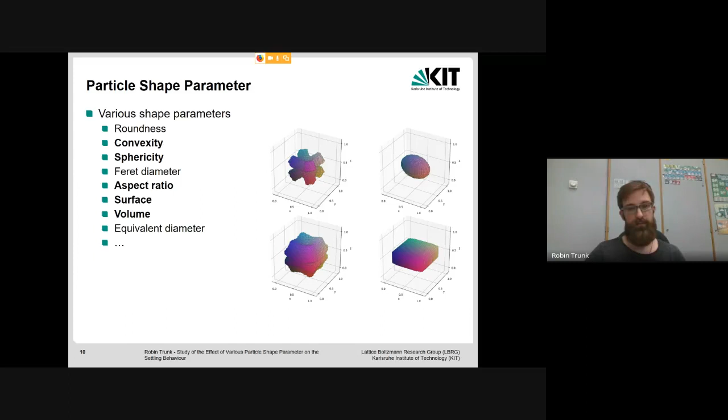Various shape parameters have to be considered to study the influence of particle shape on settling behavior: roundness, convexity, sphericity, but also volume, aspect ratio, and surface. Additional shape factors have been defined in literature to find a new or improved parameter to unify the description of particle shape.

This exploits spherical coordinates and their symmetry conditions by varying and randomizing different parameters, basically the distance, the exponent, and for the symmetry condition, some scaling parameters of the spherical coordinates.

The setup in which the settling was investigated was a box of 70 by 70 by 280 micrometers, and the particle size was up to 10 micrometers, so the box size was at least 7 times the particle diameter. Also considered in this configuration, the particles settle rather slowly because they are very small and have very little mass.

The case of ultracentrifugation has been considered by applying 80,000 times Earth's acceleration. So 150 particles have been generated and the settling has been investigated.

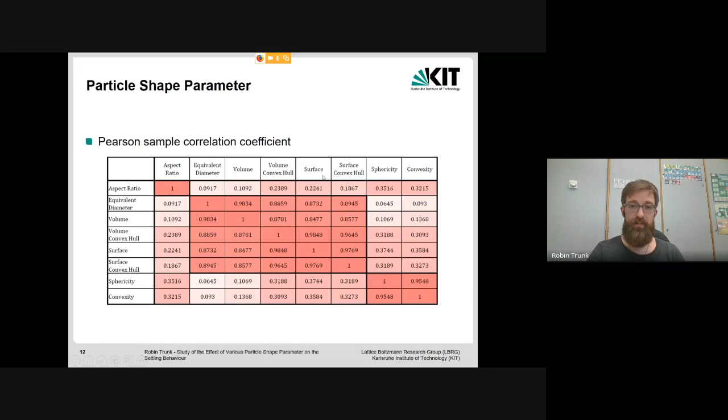What we already see here is that we will probably get to a model of 3 parameters: the aspect ratio, which has a very specific case here; the sphericity or convexity, which seem to be closely related for the generated particles; and also one parameter from this larger block in the middle, which consists of the equivalent diameter, closely related to volume, but also closely related to surface and volume of the convex hull.

So what we get from the simulations are a lot of data and nice pictures, some of which are printed here. For some, you see the influence of just one parameter mainly, or that the parameters are very closely related.

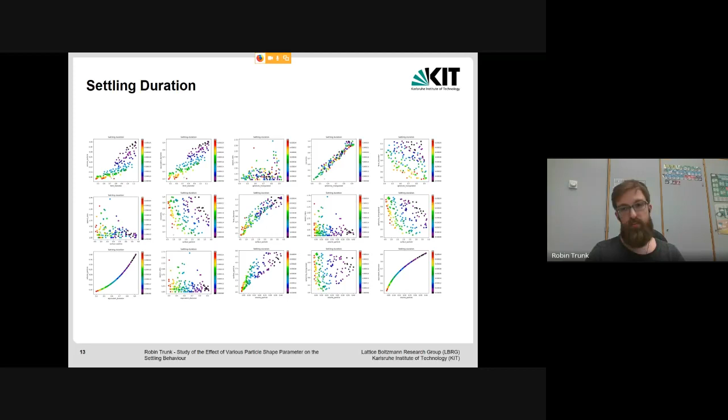For example, this is a plot of equivalent diameter and volume, and each point in this plot represents one particle simulation. So let's get a closer look at some more interesting plots.

But getting back to the numbers, the coefficient of determination has been calculated to evaluate the quality of the models found. For the medium velocity, we found the adjusted coefficient of determination to be 0.9618, which is pretty close to 1, meaning this model fits the data and the particle settling simulations quite well.

The best fitting regressors for this case have been the volume, the aspect ratio, and the convexity. So we have one regressor from each of the previously described blocks, which are rather independent. This would be the main finding.